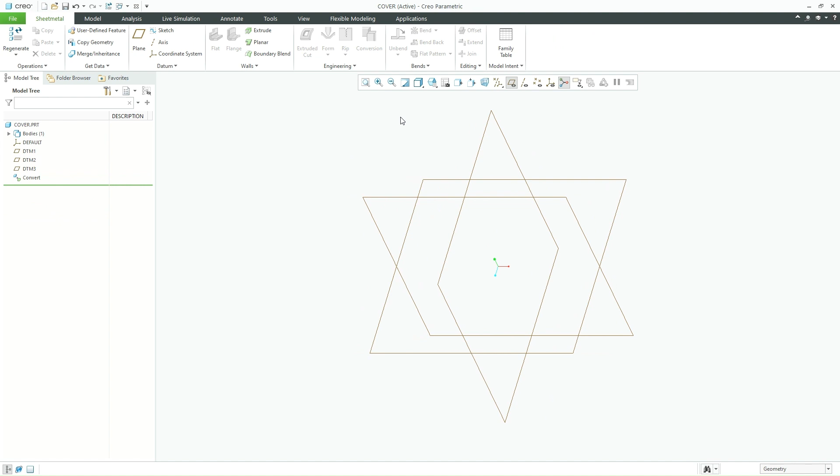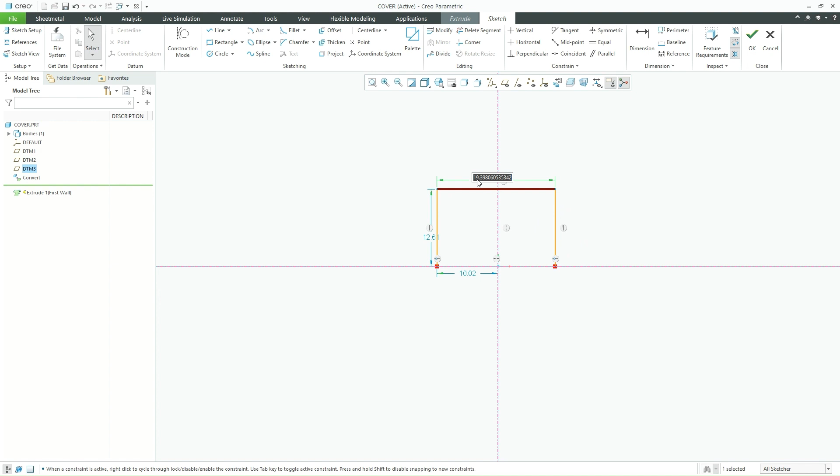I'm selecting the extrude feature, selecting a plane, moving to sketch view, marking the center lines, a vertical line and horizontal line. Let this distance be 30 and distance be 15, and we'll make this into symmetry for the vertical line and click OK.

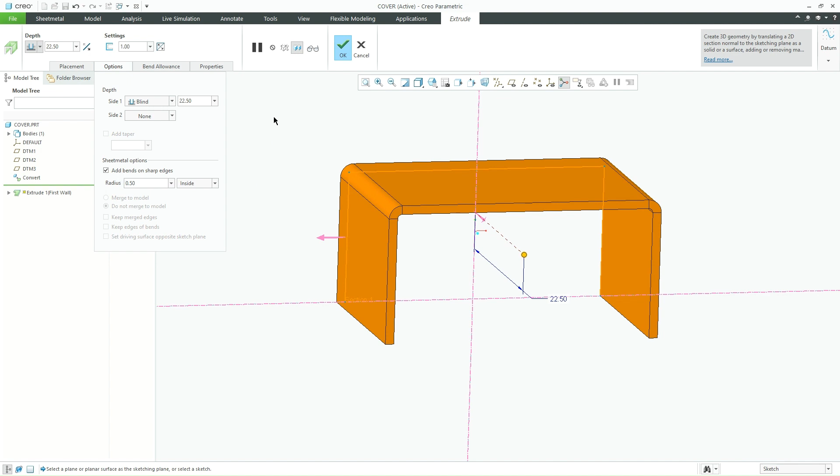So the thickness I'm getting is 1 mm, and the profile of the material is getting developed inside the sketch. I'm flipping this direction so it will be outside of the sketch, and the bend radius, the internal radius, I'm making equal to the thickness, so now I'm making it into 1. This looks good.

Next I'm going to create an extrude cut. I'm selecting these edges or surfaces for the references, solve and close, sketch view.

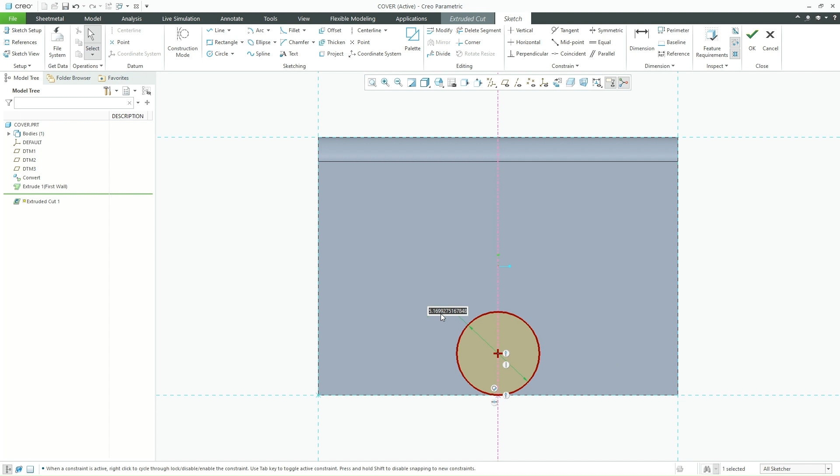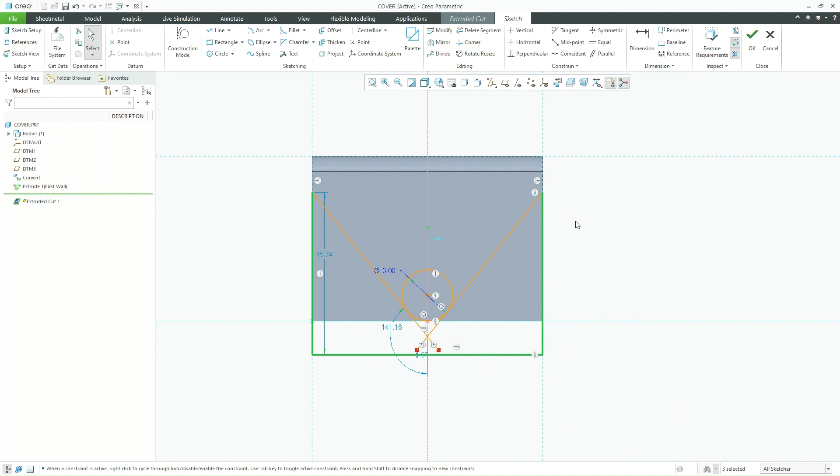I'm creating a center line, a tangent line on the left and right hand side, and the same line mirrored on the left hand side, and extra lines to cut the material. These extra lines need to be deleted. I'm selecting delete segment line and just dragging wherever I wanted to remove the lines.

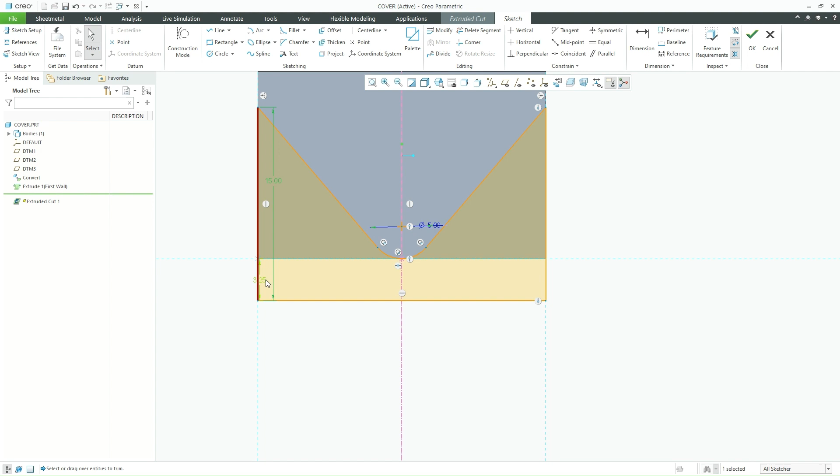So this is a profile which we need to create. Making this 15, this is 5. This distance doesn't matter, it's not into picture, so it can be as any value.

I'm expanding this to some distance. I need to also be able to get this, and I'm selecting this feature which can be cut.

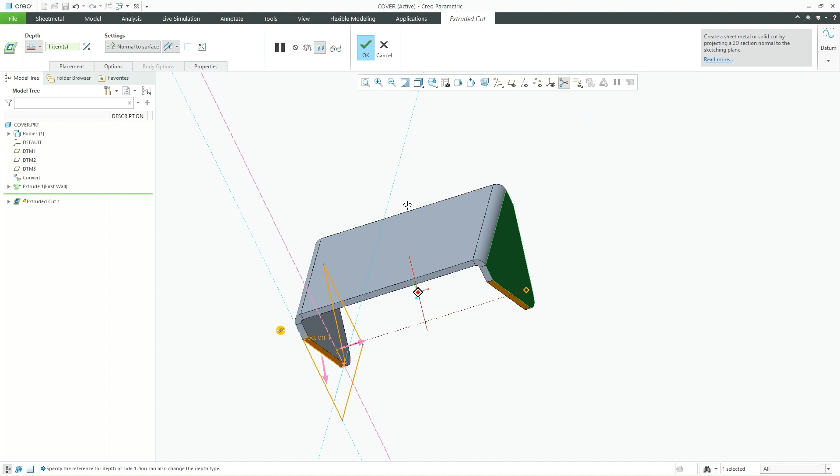So now I'm going to create a hole. Before creating a hole, I'm just measuring the distance between the top surface to this center point of the circle, which is 13.5. So I'm going to create a same hole at the distance of 13.5.

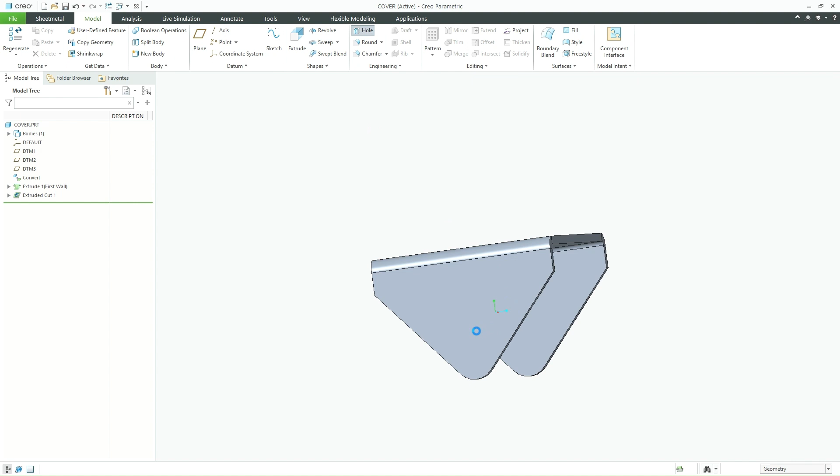So I'm going to create a hole, selecting the surface. I'm enabling the planes. So this will be as 13.5. I'm making this as 0, or else let it be as 12 as of now, but later I will make it as 0.

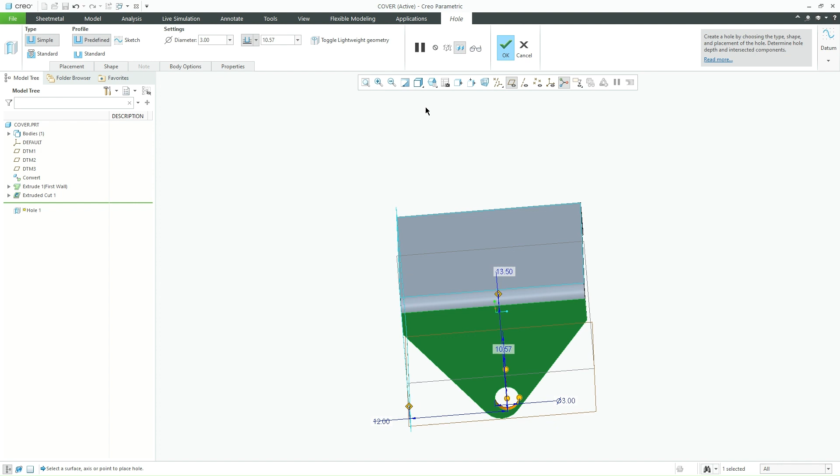The reason is in extrude I'm going to change it to symmetric option. So the total distance, which is 22.5, I'm making it as 30 and making this profile to be as symmetric. So the hole which I'm creating for clamping the pulleys will be at the center.

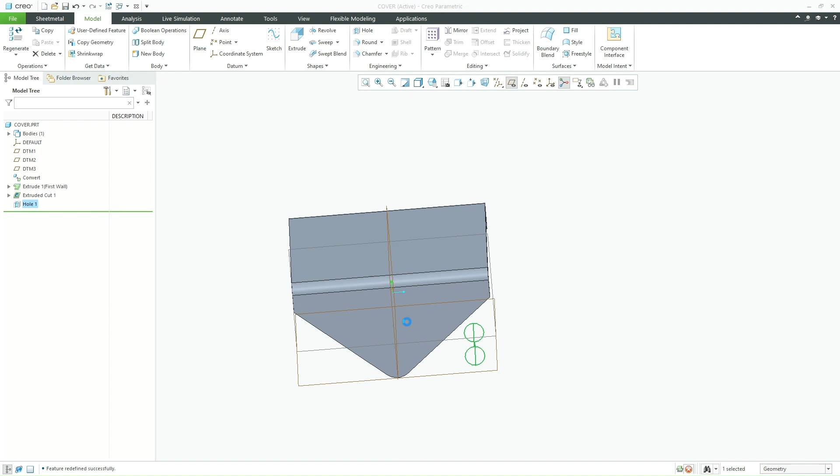So this will be as 0. And the diameter of the hole will be as 3. Yeah, fine.

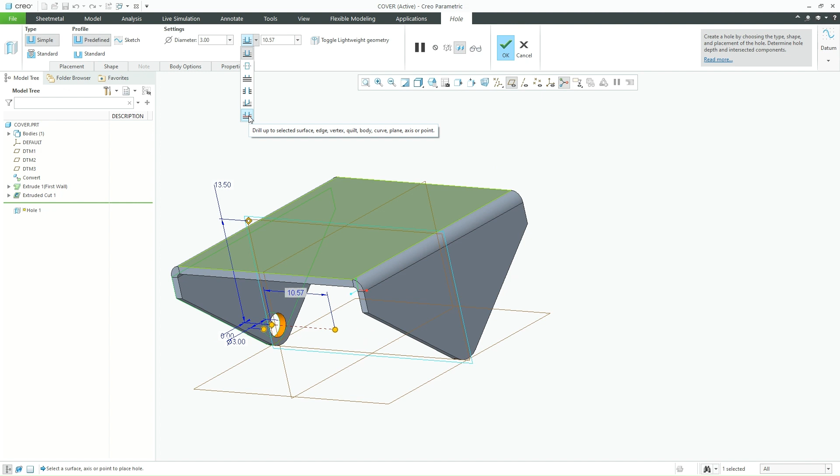And the depth of the hole - I need the hole to come until this end of the surface. So instead of selecting some distance, I'm selecting until this surface, and the hole will be generated through all.

And another two more holes on the top. I'm selecting this. One will be exactly on 0 of this plane. Second one will be at some distance.

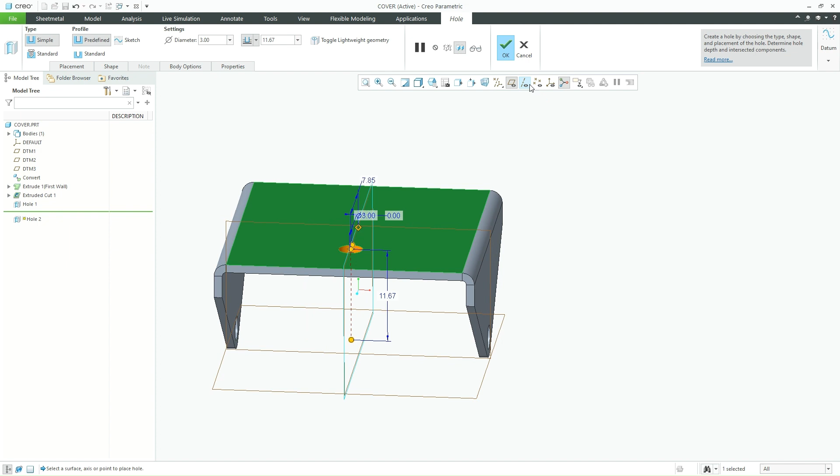So the total distance is 30. I'm going to keep it as per side, it will be 15. I'm going to keep it as 4.5. And this hole will be as 2.

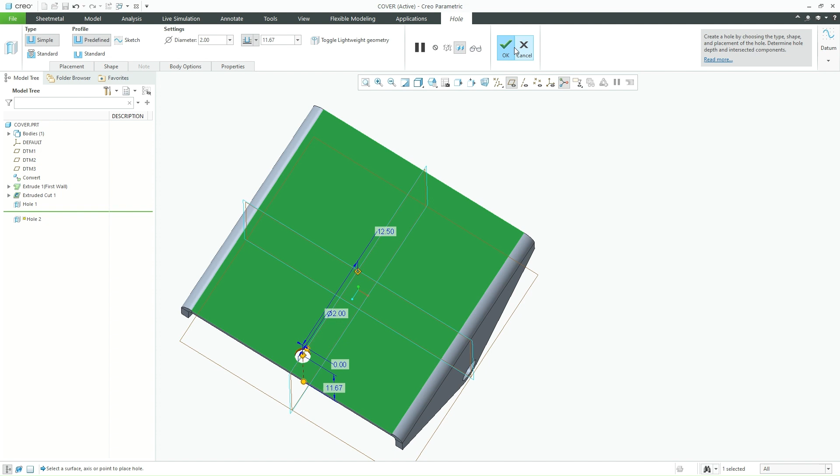And click OK. The same hole will be mirrored on the opposite side. I'm selecting the mirror command and selecting this plane. And I just click OK.

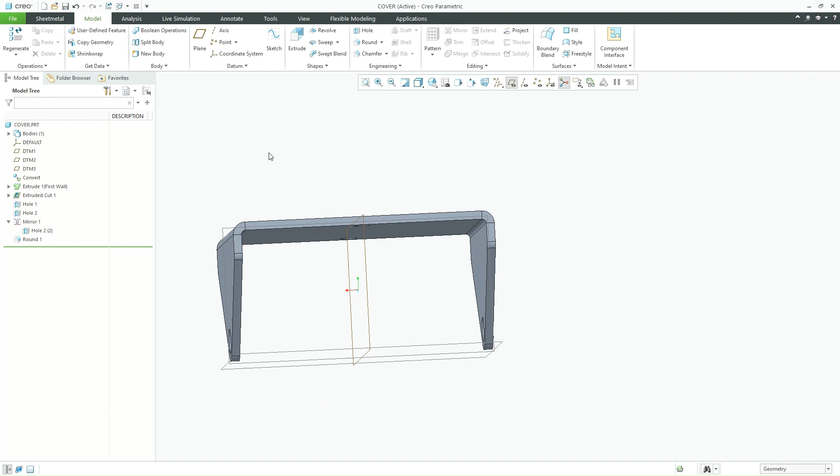So we got this cover profile. So to avoid sharp corners, I'm adding fillets on these edges for the radius of 1. So I hope this looks good.

I'm changing the color also. Let it be black.

So as I told you, using a top-down design methodology, publish geometry is one of the major important features at the end of the profile, which we are going to use in the end.

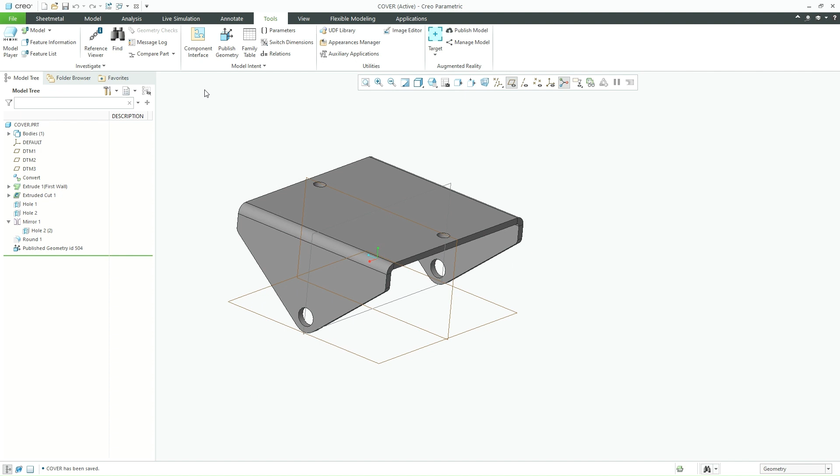On desktop, I have created a folder, double pulley, and I will save it there. And this double pulley also will be saved in the same folder.

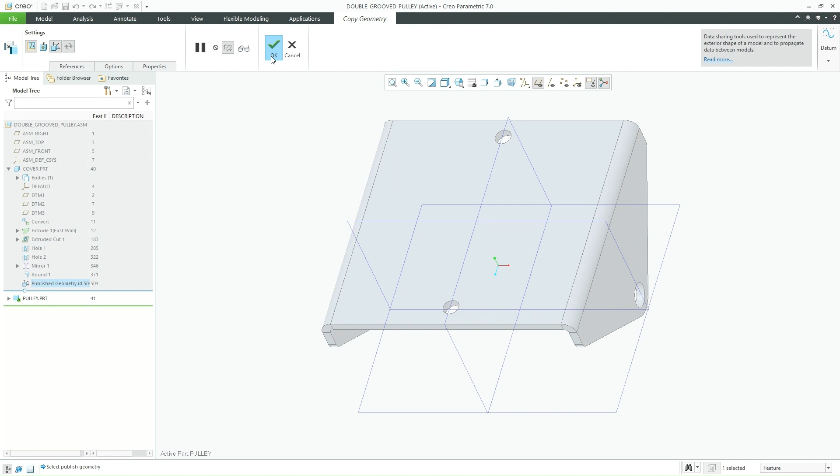Next, I'm going to create a pulley. So before going to create a pulley, I'm just activating this pulley part, and I'm getting this published geometry as a copy geometry inside the pulley part, which will be very useful to create the pulley set up.

So after creating this, inside the pulley, you can able to see a copy geometry file of this cover. I'm just creating planes, default planes, and I'm going to create a pulley.

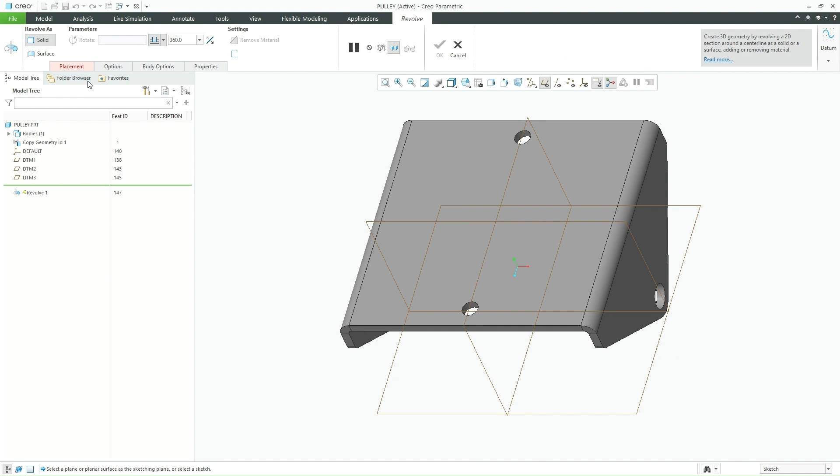I'm selecting a revolve command, moving to sketch view. So here the references I need: this face I need as reference, this face I need as a reference, and this profile also need as a reference.

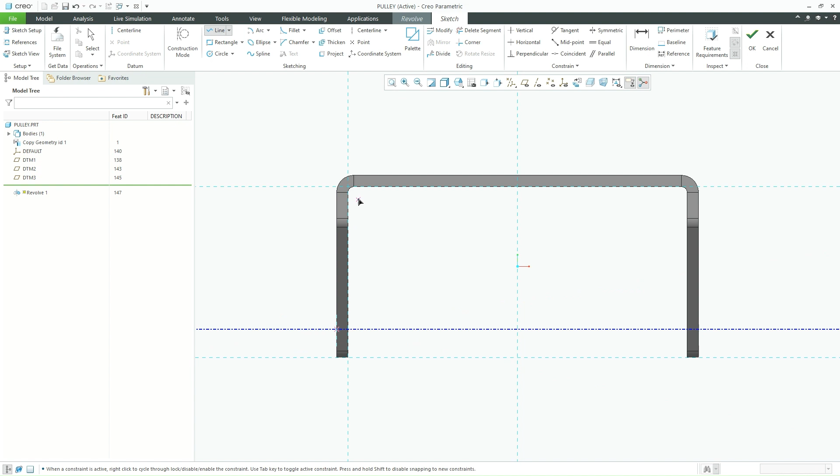So to make sure the pulley center hole and the cover hole are on the straight line, I'm adding a center line or axis line here, and I'm going to create a pulley structure.

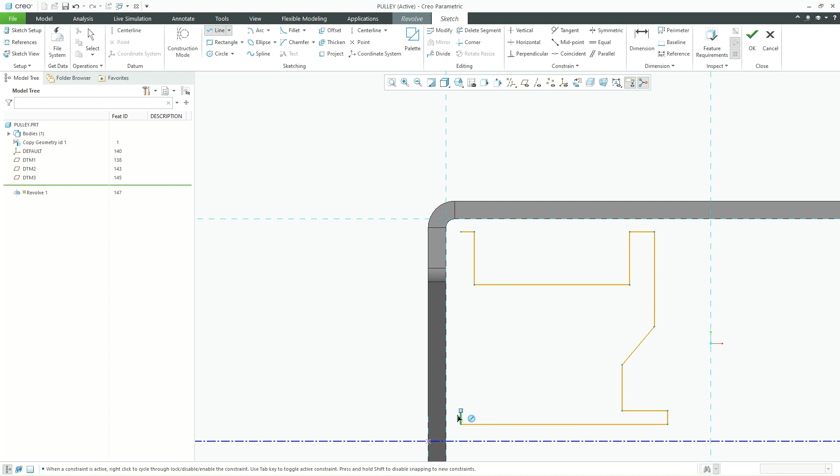I'm just creating a rough sketch as of now. Later, by modifying the dimensions, we will get a perfect profile.

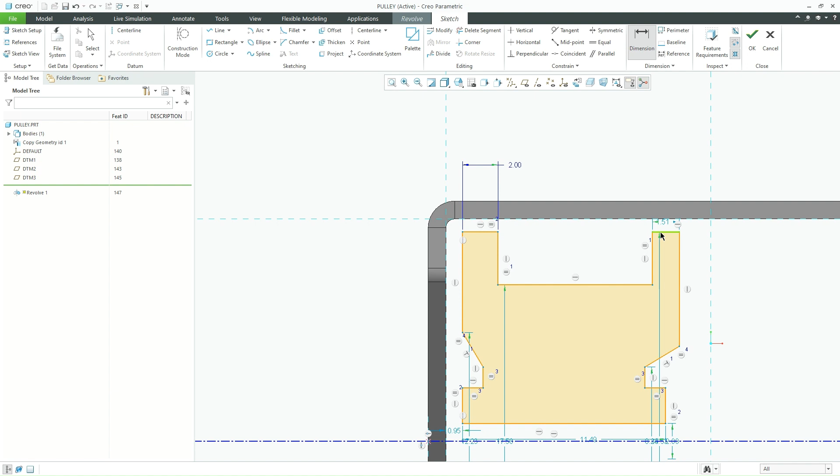Maybe this line is vertical, so I need this line as 2 mm. This line also to be as 2 mm. The distance between these two should be as 6.

Or let it be as 8. Not an issue. So the next is the angle inclination of this profile will be as 120 degrees, and the same way here, 120 degrees.

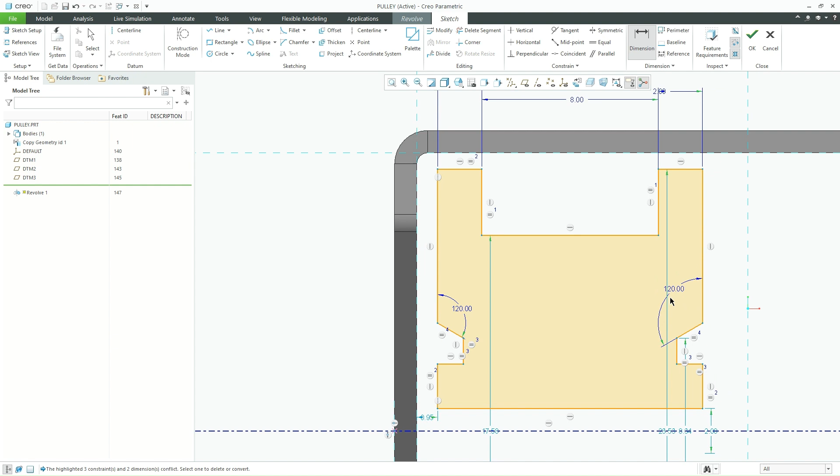Distance between the end of the surface to this will be as 1 mm, and the half diameter will be as 3 mm.

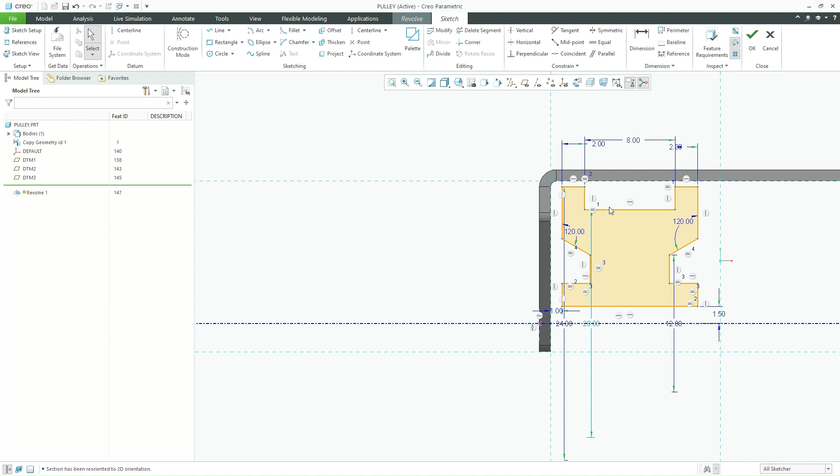And this profile I'm going to create is a circle.

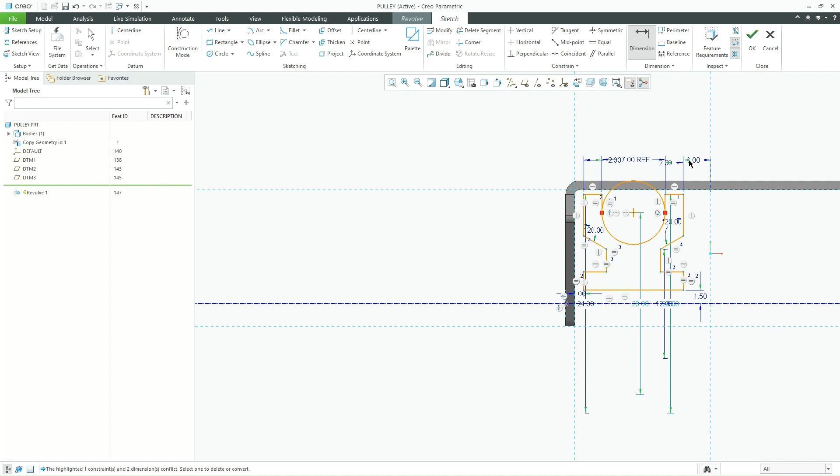And I'm deleting the unwanted lines. So here we can able to see a pulley on the left hand side, which is good.

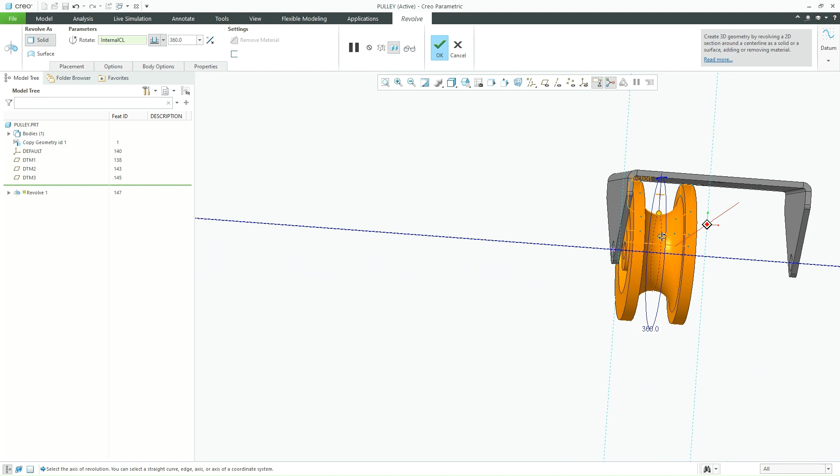As same, I'm just going to add a fillet on the sharp corners on both sides, and an entry chamfer for the pin,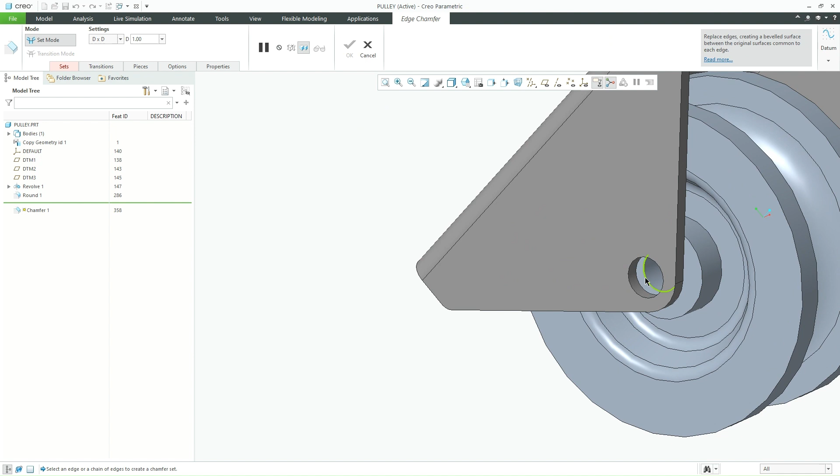which is 0.5 into 45 degree. Make this into 45 into D. Will be as 0.5. Yeah.

So next, we are going to create a... I'm adding. Let me add another round for these edges at the radius of 0.1.

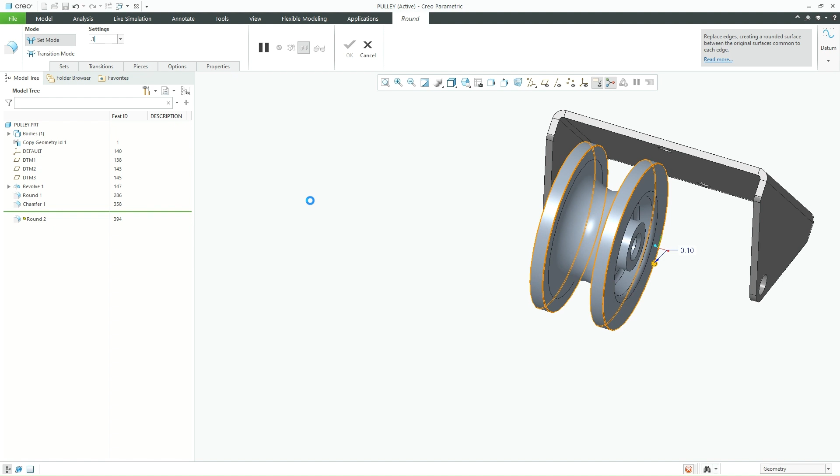So next we are going to give color for this as a green color. We'll go with metallic.

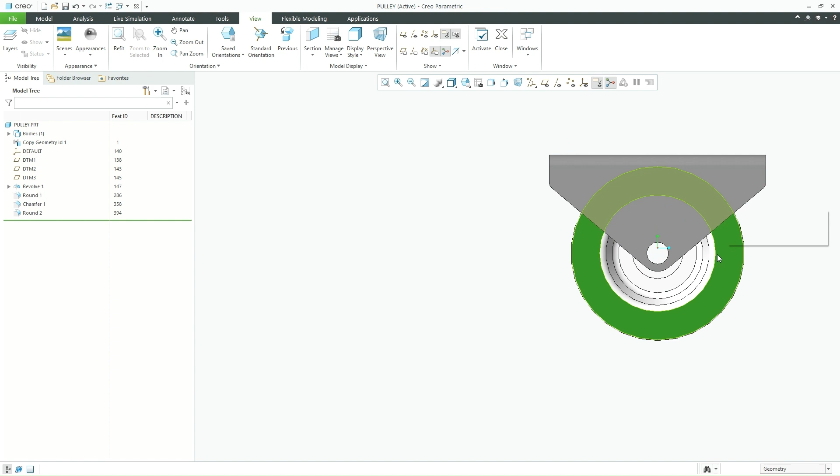So here you can see the distance of this, and in front view, and in front view also the profile looks good. So we'll make it as published geometry.

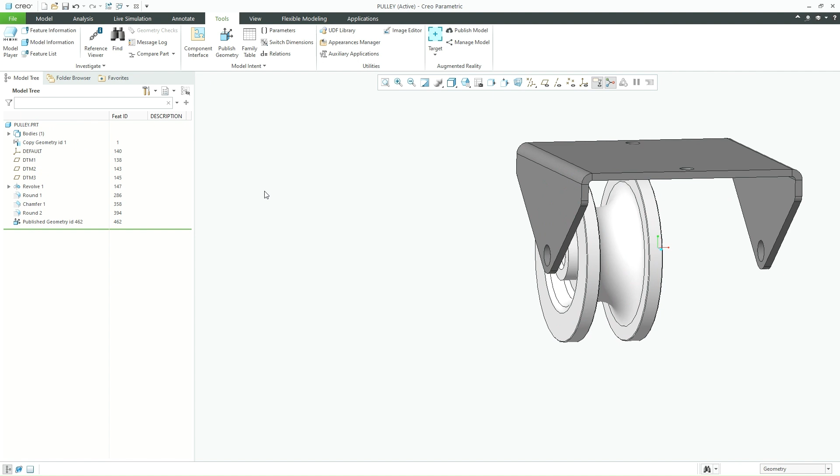One thing to remember when using publish and copy geometry: after you use such a copy geometry for reference for the next profile, always make it a hide condition and click on save status. This part will be saved in this same particular status for multiple use.

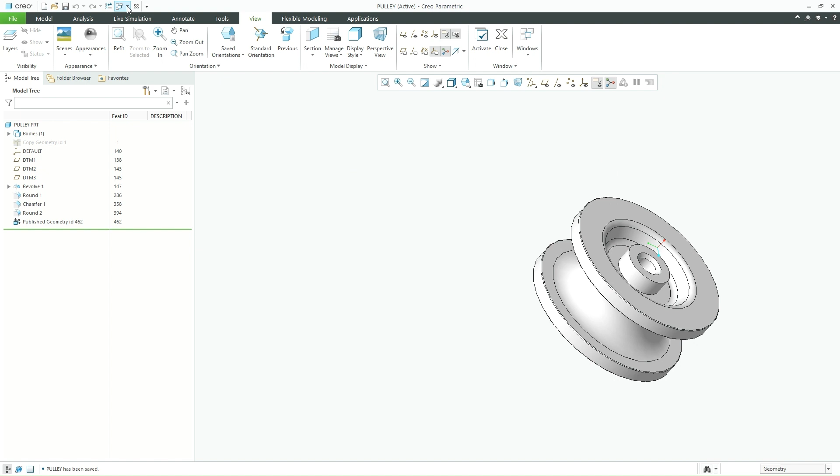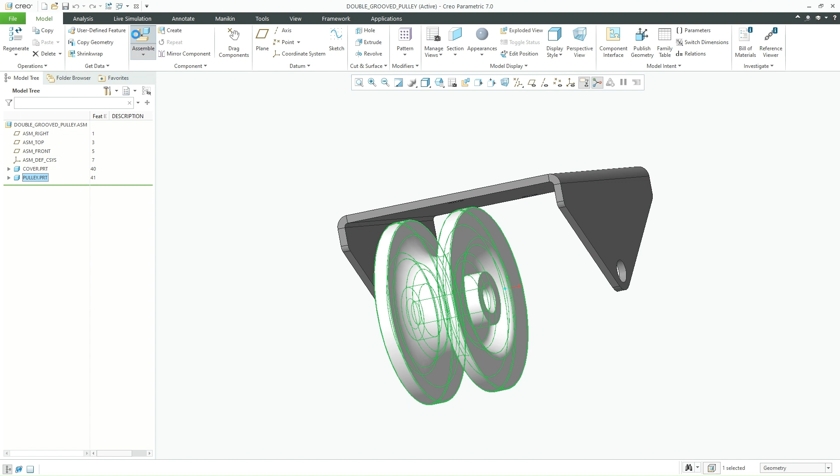Next, I'm going to assemble the pulley profile itself. The same pulley needs to be assembled on the right hand side also. The distance between this surface to this cover surface is 1 mm. I'm going to assemble it once again, selecting this pulley, and select this profile to be a coincidence. The outer surface of the pulley and the inner surface of the cover should have a distance of 1 mm.

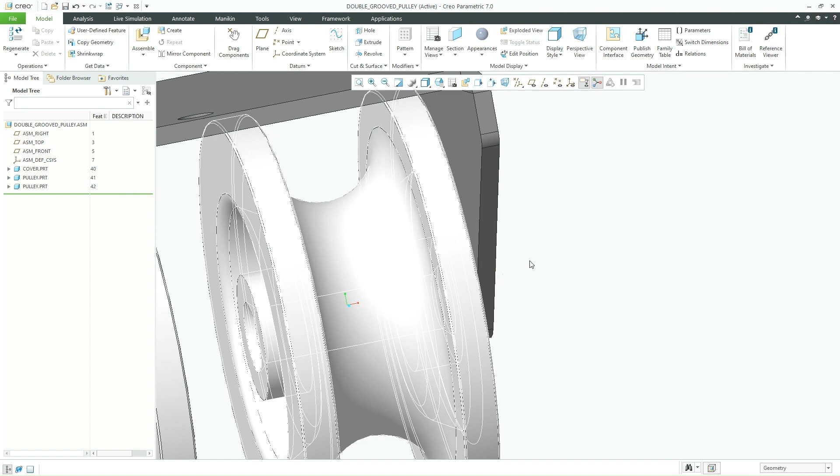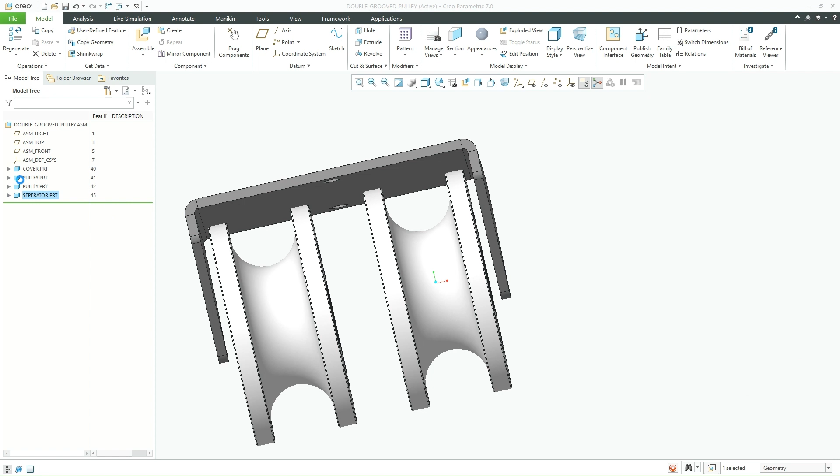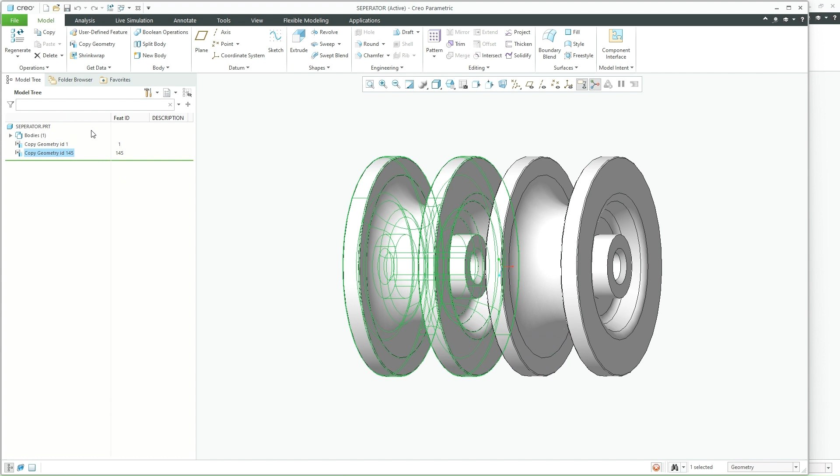The next thing is we need to create a separator in between these. I'm creating another new file which will be the separator. To this, I'm adding both pulleys as references. Let me hide one set of copy geometry where it will be useful for me to add features.

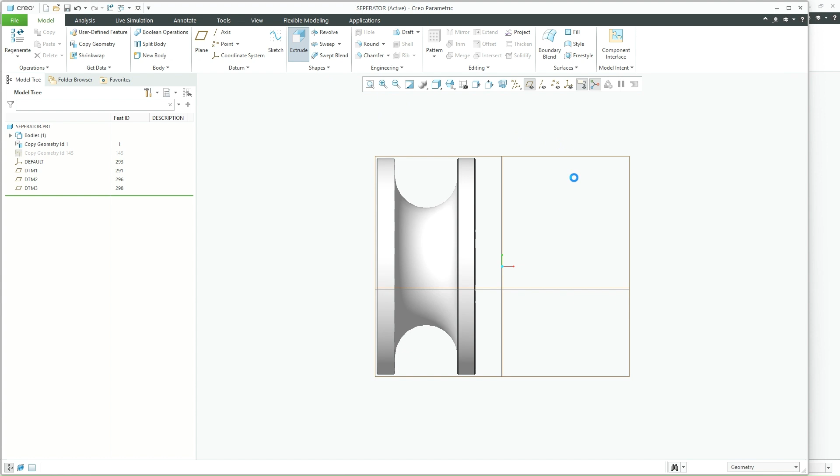Here we can see this plane as the center one. That's the plane where I'm going to create a profile now. I'm selecting an extrude feature, selecting this particular plane and moving to the sketch view, adding center lines on both horizontal and vertical direction, as well as on the center point of this circle. The same way I'm going to create a profile equal to this.

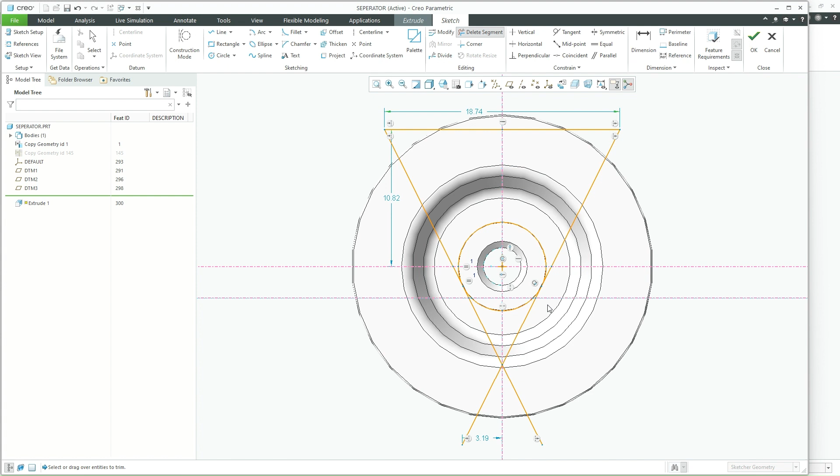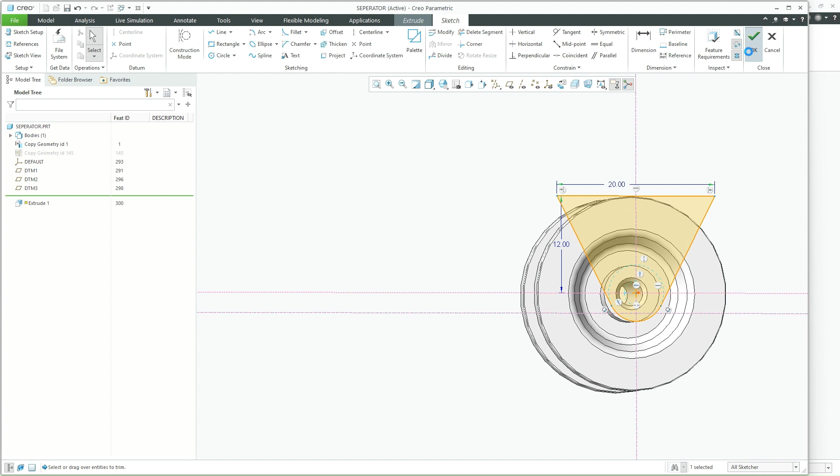This was a tangent, and the same line will be mirrored on the opposite side. The extra lines will be removed. I'm going to increase this height as 12 and this length as 20. Extrude will be 2 mm as symmetric. We'll make it 4. Or let it be 2 mm itself.

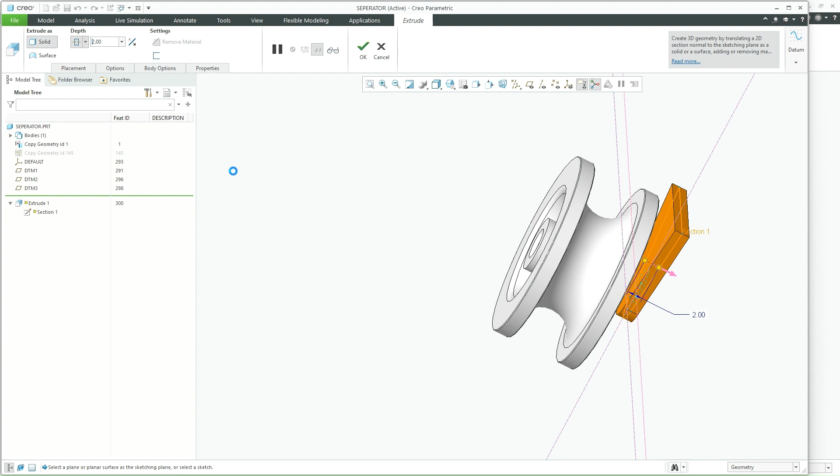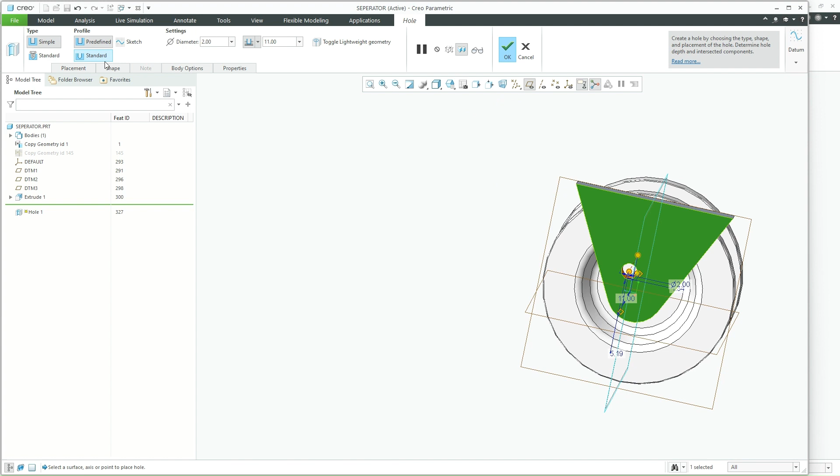I'm going to create a hole same as what we did in the pulleys and the cover, enabling this display. As of now, I have added the hole as 2 mm from the vertical distance. Let me verify whether it's okay or needs to be modified.

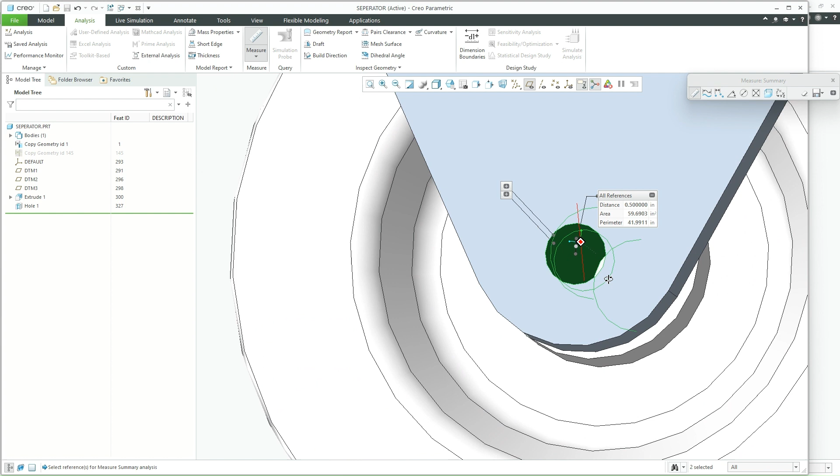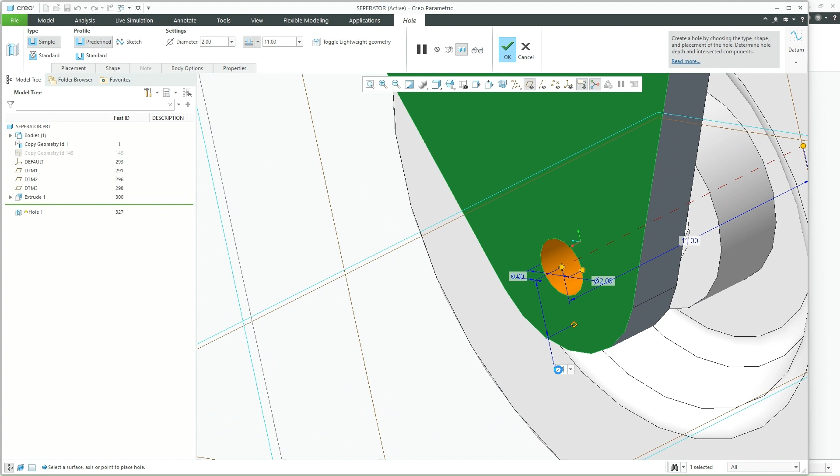To verify it, select this hole and this hole, check the distance between them. It is 0.5 mm offset. So the profile hole in the support is 0.5 mm offset below compared to the hole in the pulley. I'm just going to modify this hole command and increase this to 2.5, then click OK. So the distance between this hole center to pulley hole center will be the same, 0 mm. It's good.

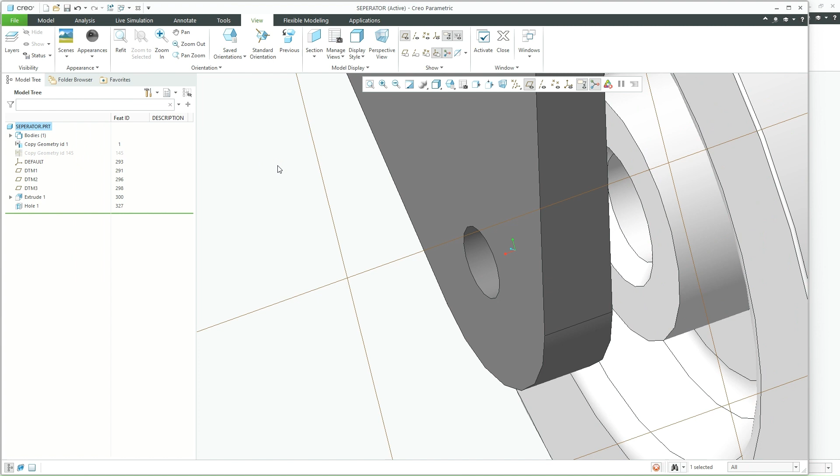This also changes to the color black, and publishing it is not required. I'll hide this copy geometry, save status, and save this file and close it.

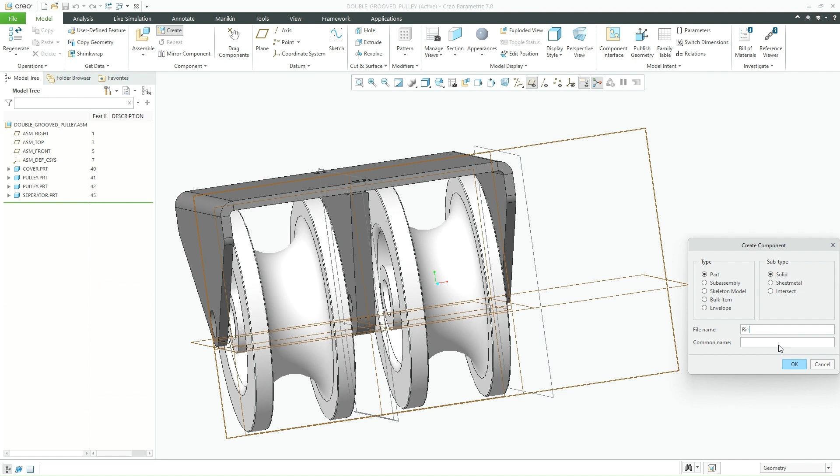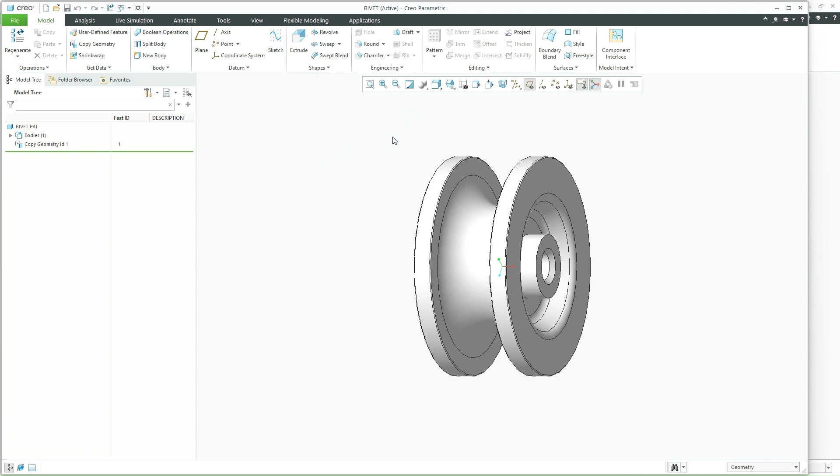The next thing is the final part, which is we are going to add a rivet part. To add that, I'm creating another new file. In rivet, I'm going to make this active and get a fully copy geometry there. Open this in a separate file, adding the planes. I'm just going to make a normal extrude for the rivet, taking this circle as a reference.

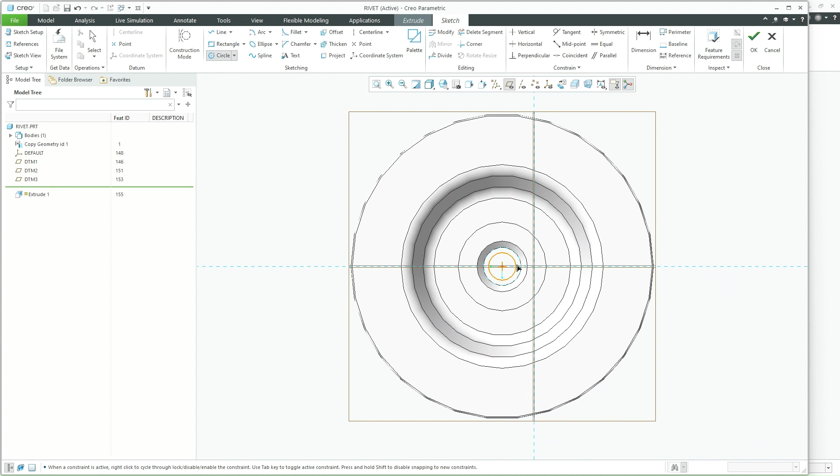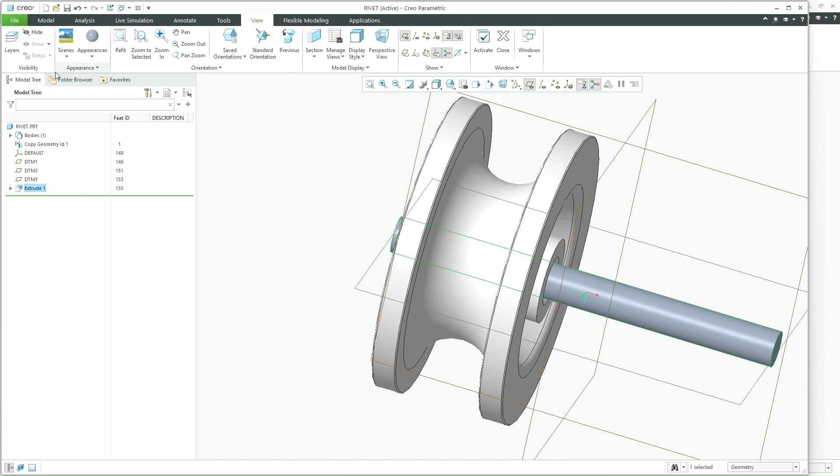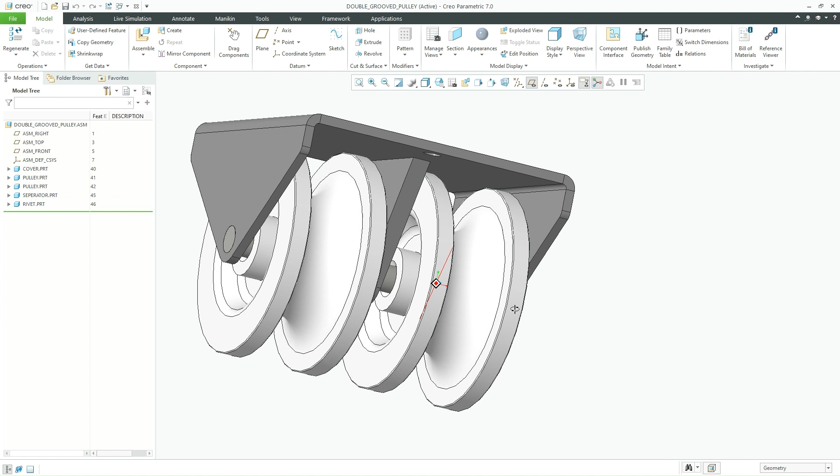Length will be 32. Since for the cover we have given 30, giving the rivet as 32 so that one will be offsetted out towards outside in the main assembly. For rivet, I'm going to give it... let me increase the extrude of rivet for even 2 more mm. It's 32, I'll make it 34, and click OK.

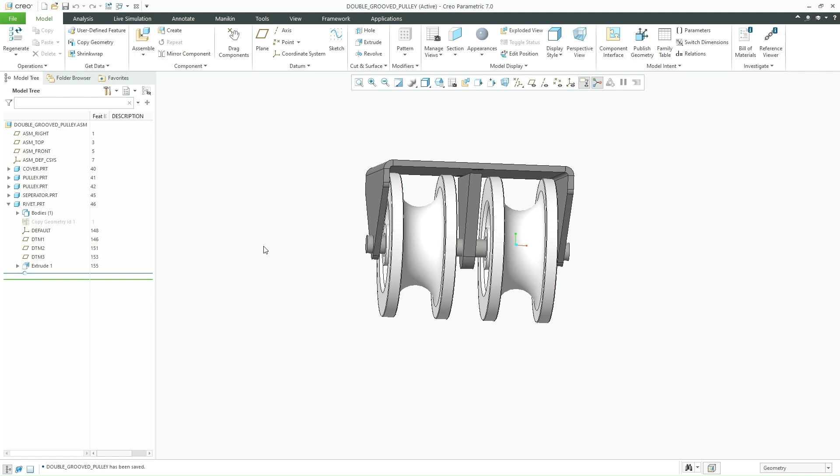So here, as you can see, the double groove pulley assemblies, which is done in a CAD model, with the separator, and these two holes will be used to clamp the double groove pulley assemblies with a frame using M screws.